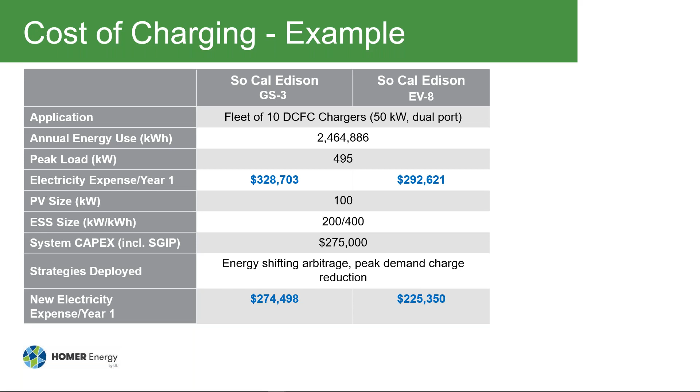Thank you, David, for the introduction. So I will be giving a software demonstration of the EV feature, and specifically I'll be comparing a firm charging requirement to a managed charging application. And so that we're on the same page, sometimes I may refer to the firm charging application as an on-demand EV charger, and I may refer to managed charging as a smart deferrable charger. So for my purposes, those terms are equivalent.

Next slide. The EV feature is new to HOMER Grid, one of the two main products that HOMER Energy by UL offers for its desktop application. And HOMER Grid is specifically designed for modeling grid-connected, behind-the-meter systems. A dispatch algorithm that models demand reduction as well as offsetting utility bills through self-consumption and energy arbitrage. Finally, it has the ability to model the value of reliability and resilience for grid-connected systems.

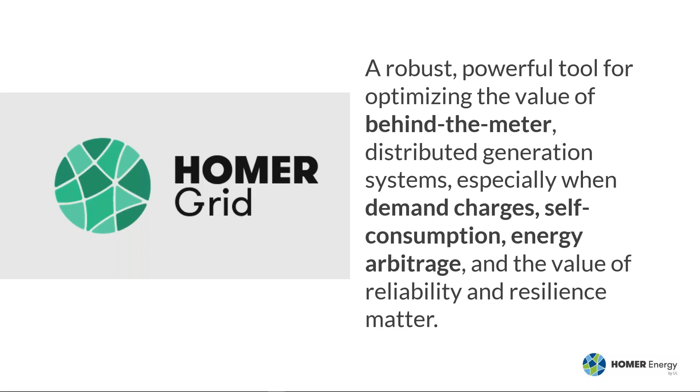So HOMER Grid can help you find the lowest cost combination of solar, storage, wind, and a generator that will meet your energy needs. Ultimately, it helps you test different scenarios and design a system that ensures that your energy demand is met by generation sources. And as of today, version 1.8, your energy demand can include this additional load that an EV charging station requires.

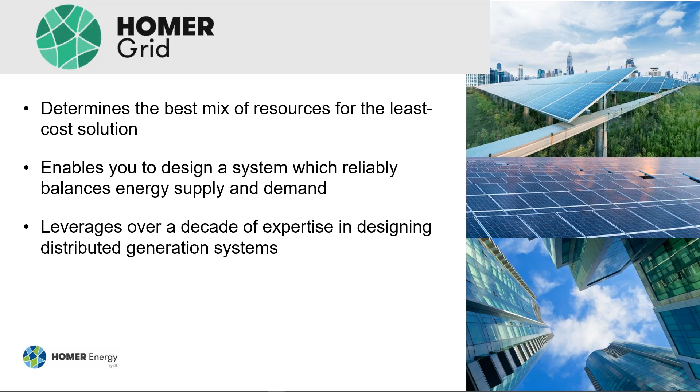So just to summarize what HOMER Grid offers, the dispatch strategy that I mentioned has the ability to stack value streams like demand charge reduction. It offers the ability to dig deep into the details and understand the risks around project assumptions. And ultimately, it helps you create beautiful reports and graphics that you can use to assist your potential clients and counterparts.

We make it easy to model PV and wind production by offering built-in resource data and a library of tariffs for North America. If you're not in North America, or even if you are and you need a custom tariff, we have a Tariff Builder in the library feature, which allows you to build any kind of tariff that you need. And our specialty is really around our storage modeling, so we can accurately model storage lifetime by wear and cycling and temperature degradation. HOMER Grid can model CHP systems, and now we are showing you the ability to model EV requirements.

So specifically about the EV requirements. This is HOMER's first EV feature, and the world of EVs is very large. There's different aspects of EVs which could be of interest to you, and we would love to hear your feedback. For this first release, we're modeling two specific things. The first is a firm on-demand charging load, and that would kind of cover the convenience charging application where the car shows up and it must be charged. End of story.

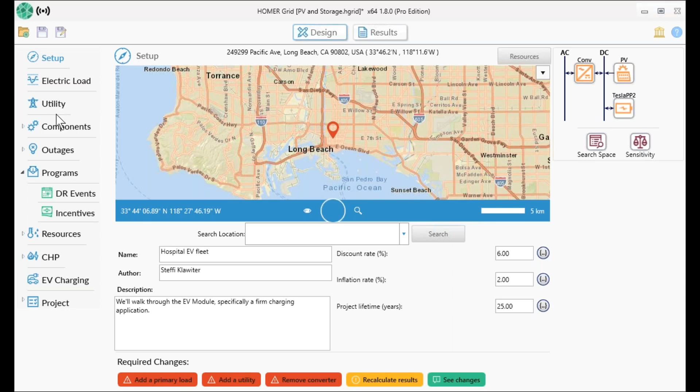We can set up some high-level economics and then continue down this left-hand side. We won't consider the hospital primary load today. We'll just consider the EV load. So we'll skip that. And under utility, this is where we can define the different tariffs that we're on. So in the zip code, we're pulling from the tariff database. I'll pull the relevant tariff using our filtering tool. And we're going to GS3E.

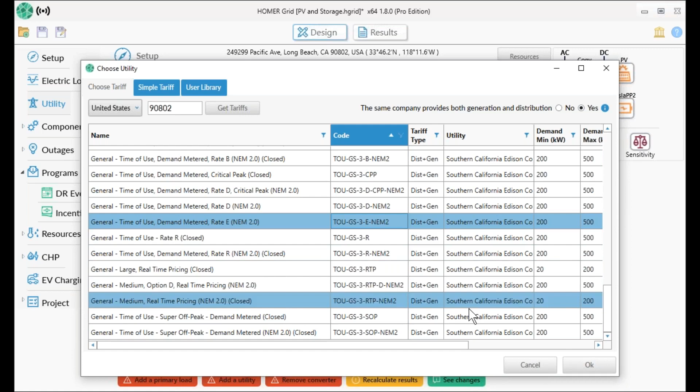All right, so this is the tariff that the whole hospital facility is on. And we've put a lot of effort into really building out this tariff interface so that you can fully understand what information is coming over from this database. So by clicking through these tabs here, you can understand exactly what rate the database has for on-peak summer, on-peak winter, and you can verify that that's all correct by going to the tariff PDFs. That should link to the actual PDF that this tariff is based on. So that's a great way to get confidence your basic inputs are correct.

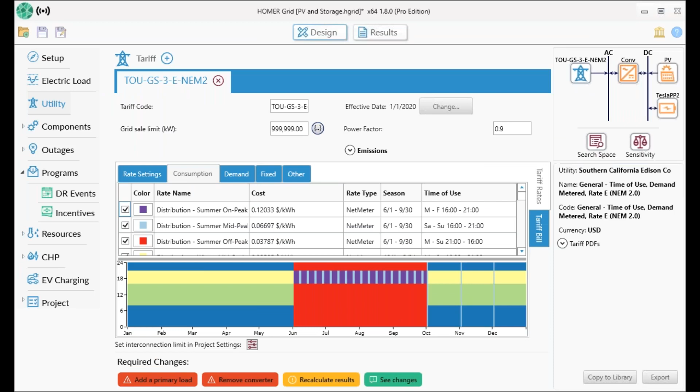And this tariff database is a great tool to help you quickly get started just by choosing the name of your tariff. If you would want to build a custom tariff, you could use the library feature in the upper right-hand corner. So this is our first tariff, our general tariff that we're on, and now we'll consider what our EV tariff would look like. And we'll consider time-of-use EV8.

So similarly, we can go through and understand exactly what information this tariff includes and how that affects the utility bill. So what's our base case situation? So it's good to take a minute and get confidence that this utility plus load system matches up with your utility bills, because that will be the foundation upon which your other compare economics calculations are based.

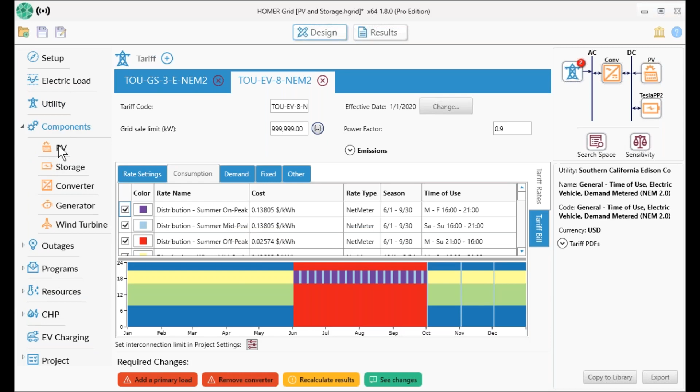Continuing down the left-hand side, we've actually already set my PV. I'm testing 50 kilowatts, 100 kilowatts, and 150 kilowatts for this system. And for our storage, we've chosen to consider 1 or 2 batteries and define costs here with capital, replacement, and operational costs.

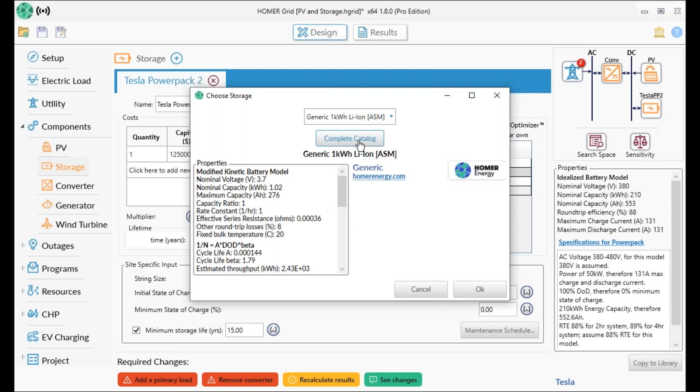However, you are of course welcome and encouraged to create your own models. So with that, I've set up my PV and my storage and my converter. And now we will skip through the EV charging load.

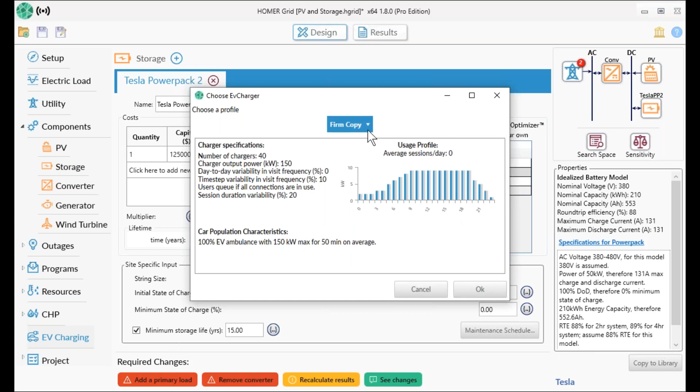For this case, I've set up an example of the firm charging. So this is a library of examples that you can choose from, and bold means that's my personal library. So for this firm charging requirement, the first thing that you define is your charger specifications. So the charger output power is max of 150. We're considering 40 chargers. And then you'd go on to define what the usage profile is.

What I've defined is 100 charging sessions per day here. And the sensitivity button will allow me to test what would happen if it was actually 120 charging sessions per day. What would happen if that was 80 charging sessions per day? Would my ultimate system design change based on those parameters?

And finally, what you'll need to define for this EV charging feature is the vehicle type. So in this case, we're just considering one generic EV ambulance. That is 100% of the population. It has a max power, which is actually equivalent to the charger output power. It doesn't need to be; whichever is the limiting factor is what HOMER will take. And on average, you charge for 50 minutes, 150 kilowatts.

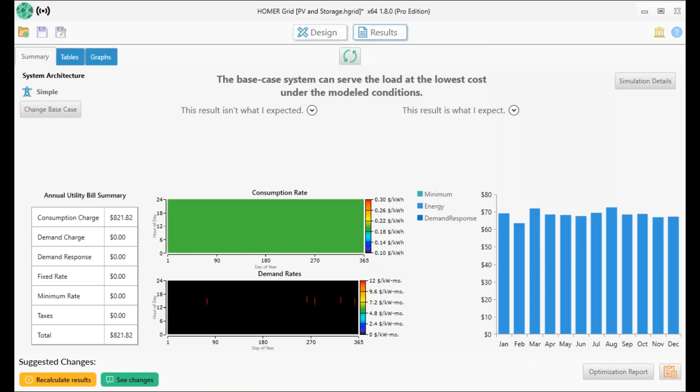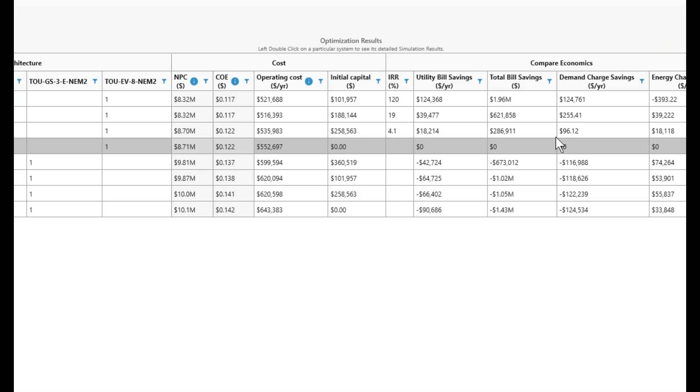So with this, we've defined basically our EV load, which is non-flexible, which is a firm requirement. And HOMER can give simulations which meet this load. So with that, let's go to looking at the results. And I pulled up an example already. So these are the results that we've calculated from that file.

As you can see, we're comparing the general tariff and the EV tariff. And the EV tariff is a cheaper tariff for this use case. So you can see that the systems are sorted by net present cost here. HOMER optimizes on net present cost. So the systems presented are going to try and achieve that lowest net present cost.

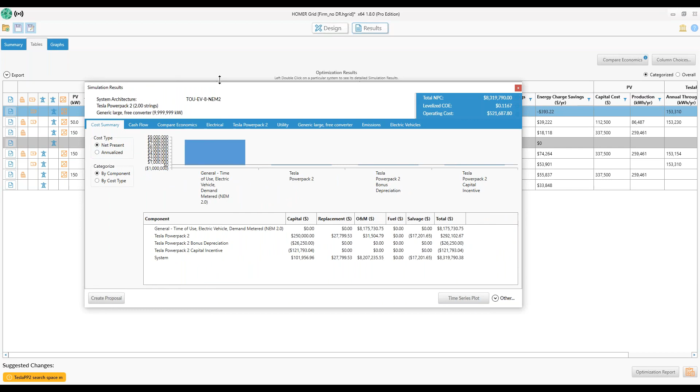You can look into any of these details further by double clicking on them. So we can look at this battery system for the firm charging requirements. And the details will show you a cost summary, your cash flow, which you can then export into Excel and further do post-processing or whatever you need to do for your financial models. We can compare how the hybrid system is more economically advantageous than the utility-only system,

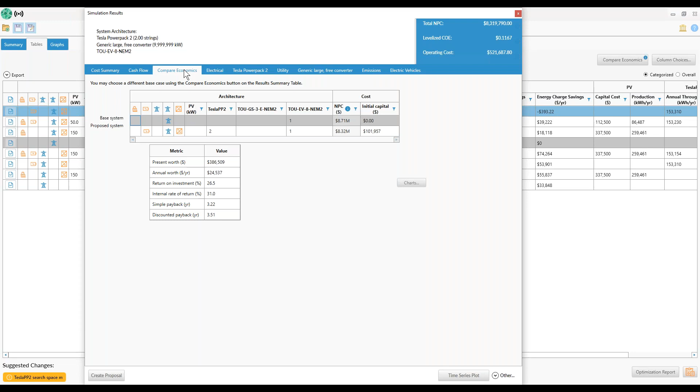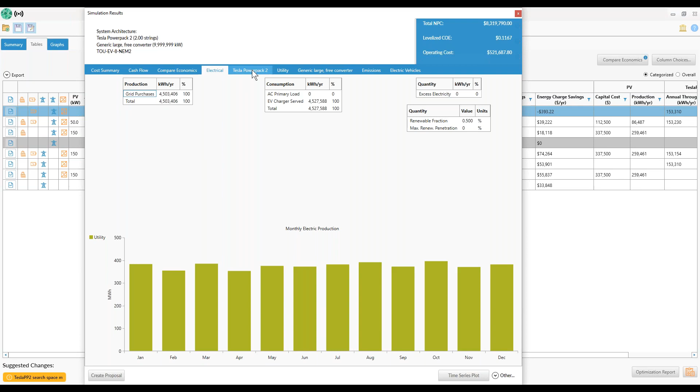and see how the electrical production sources are meeting the demand here. And for each component, you'll be able to see exactly how that is operating. So this is engineering details that HOMER provides. Finally, our EV feature: this is the load that we had set up, and charging sessions per year, average energy per session. That's all outputted here.

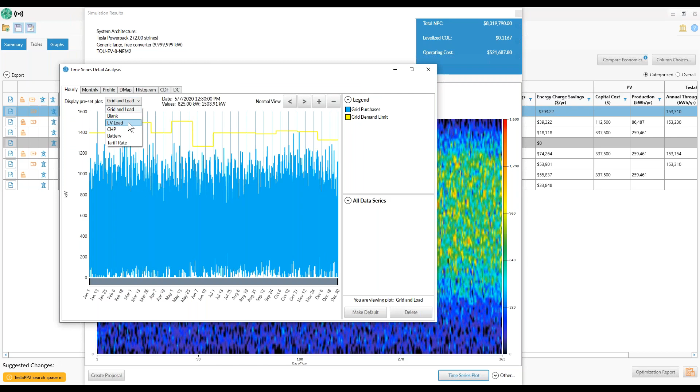If you wanted to see specifically what is happening time step by time step, or how this EV load is being served, we can go to this time series viewer. And you can customize this completely. There's all these data series here. So we can look at the total EV charger served. And that's served by a combination of grid purchases and the storage on the bottom.

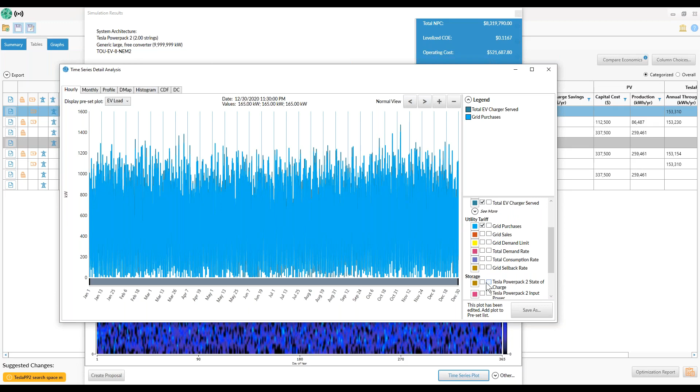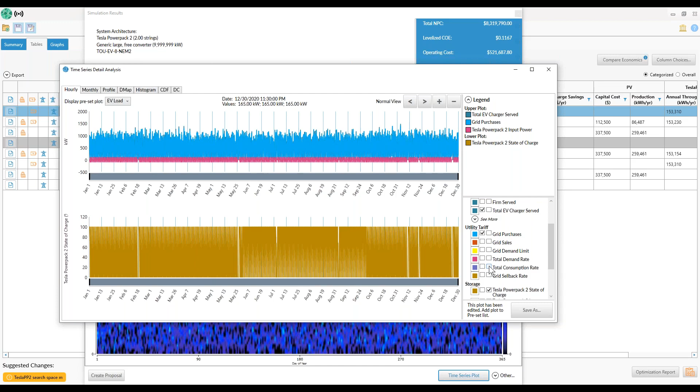And finally, it may be interesting to see, is the storage discharging in line with the consumption rates? So with that, I'll zoom into a specific day. I'll make this big. All right, so what we have here is our EV charging load served. I'll make that a slightly different color. And the grid purchases. So largely this EV load is served by the grid purchases, but the battery is able to charge and discharge, charge when the cost is low.

So you can see the yellow state of charge rising as the price in purple is low. And as soon as the on-peak time hits, then the battery discharges. So this is how you could really get a feel for how HOMER is choosing to dispatch. And you can take this and put it in a report. So the time series, there's other visualizations as well, but this is how you can get a good look into how the system is operating.

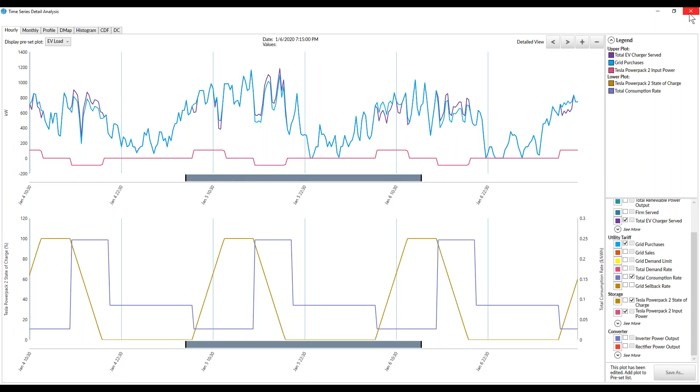I'll wait to show the report actually for our second example. We'll go back to the design view, and we'll start to consider what would happen if I was actually able to manage my EV load. So we're back here. We've got our firm charging EV load set up, and now we'll do a managed charging load.

So I've set up the same charger specifications. We have 150 kilowatts, we have 40 chargers. Our ambulances require the same amount of energy. However, they are parked for an average time of 7 hours. Similarly, there's the same daytime profile that is heavier than the nighttime profile, and there's 100 charging sessions per day.

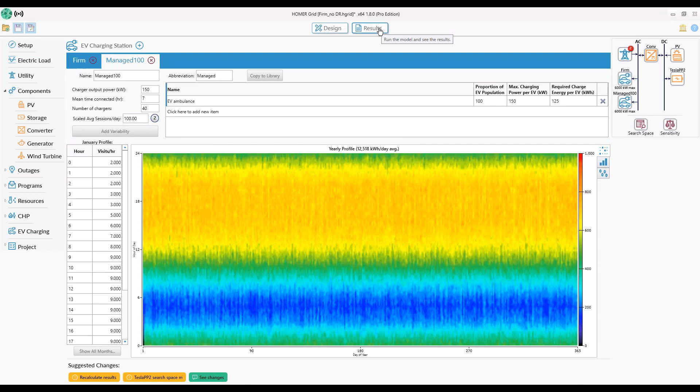And what I'm going to do here is I want to explicitly compare the managed versus the firm. I'm going to use our sensitivity feature here. This is pretty powerful. It's a little bit of an advanced tool, but you can test with 100 sessions per day or not managed at all. And you can link the sensitivities here. So we're going to do kind of with one or with the other, and we'll compare them. All right, so with that, we can go back and calculate. And because it will take a minute, I'll switch to calculated those results in advance as well.

All right, so what I'm showing here is sensitivity analyses are shown in the upper table. So the top one is the managed charging application, and the second is the firm charging application. And by clicking on each of them, you'll notice the lower table changes. That's choosing which sensitivity variable you'd like to consider.

So for our managed charging application, notice at a high level, you can compare the winning system, which is the storage system, to the winning system of the other sensitivity. And you'll notice that there's a dramatic decrease in net present cost if you are able to manage your EV load. So 8.32 million versus almost 6 million. It's a great savings, and you can see the cost of energy in that as well.

So considering that we want to further investigate this managed case, we'll go and look at this battery system. A PV system is also a great way to save money versus the base case, and it's interesting that either PV or storage alone actually provides the lowest net present cost here. So looking at this battery system,

this is our simulation results for that simulation, and for this EV, we're looking at a managed load. You can see the high level information. And what's really neat about this managed load is you can get further information about, okay, so we have 100 sessions a day. On this day, we have 101 sessions. And you can see for every single individual vehicle that arrives, how is that vehicle charged and when is that charged? So you can see the different colors are the different vehicles arriving, so it looks colorful if not overwhelming, but it's beautiful.

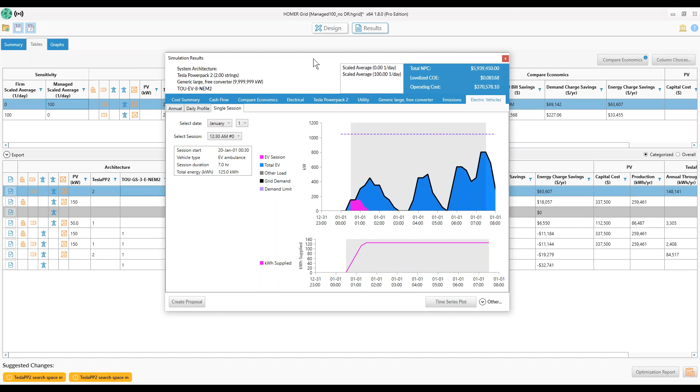All right, so with that, we've compared how the different tariffs provide different savings or costs. And we've seen how the hybrid system can ultimately reduce the net present costs for your system. We've compared the economic benefit of a managed charging application versus a firm charging application, and say that we've come to the point where we understand that we're going to go for a managed charging application, these two Tesla Powerpacks, and now we'd just like to create a proposal.

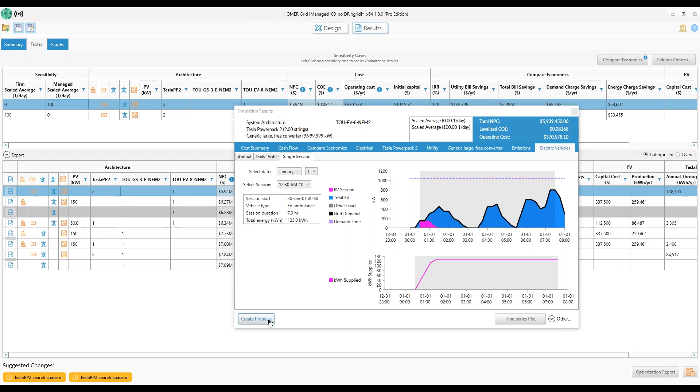And Tricia mentioned that this was new as of January. So we have two different proposal types. There's kind of a detailed report, which has been included in HOMER for a long time, and this client proposal, and that's new. So for the client proposal, it's more focused on communicating the details of the simulation in a beautiful way to your respective counterparties.

And set the client information. It's also about showing yourself in good light, so you can set up your own company information, company testimonials, your logo, all of that can be customized and it'll be saved to your user settings. So you only have to fill it out once.

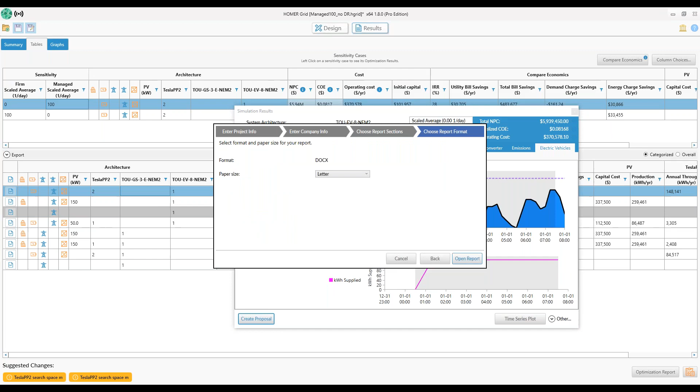Finally, you can completely customize the report that comes out by choosing to include or not include sections in the report. And you can also change the order just by dragging and dropping. Right now the report is in the docx format, and we'll open that up. And here's what you'll ultimately be able to get and use and further customize to your needs.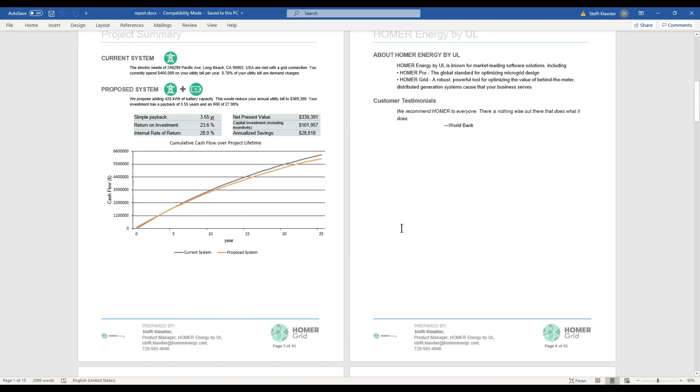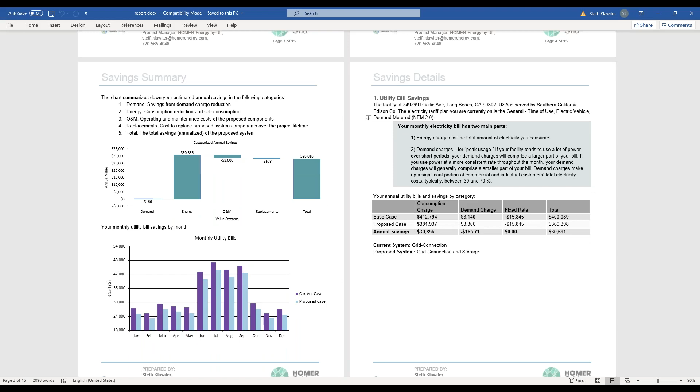So just quickly, we have great looking setup, your customer testimonials, high level information about the product, and then ultimately, how does this system save the hospital money? How is this the lowest cost system? You can further explore the different features that we have. As Tricia mentioned, this is in beta, so I really encourage you to check it out.

Tricia, I'll go back over to you.

Well, just some takeaways. As we mentioned before, what we discussed was comparing two tariffs, how the EV tariff has a lower lifetime cost than the general tariff, how managed charging requirements can lower your NPC by 30-some%, and how ultimately HOMER is designed to find that optimal, lowest cost system that can meet your facility's energy demand and EV charging requirements.

All right, thanks, Tricia. Back to you. Thank you, Steffi. So now we'll want to go to questions. Thank you both Steffi and David for a very informative presentation. We will have a lot of questions, I'm sure, and while those are streaming in, I wanted to address one question that often comes up.